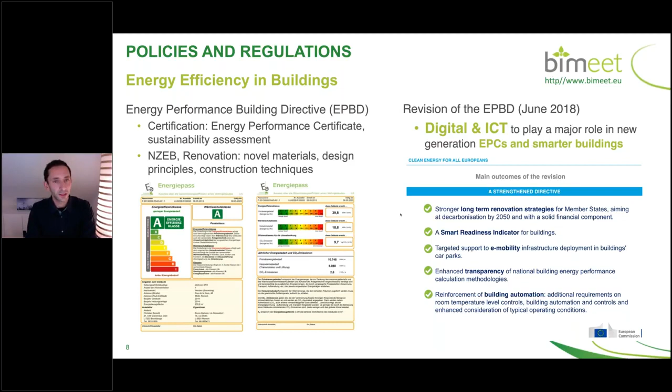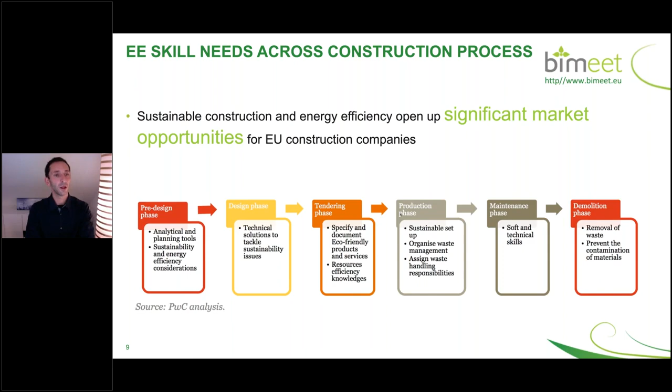In the meantime, we can see that digital technologies, ICT, play a major role now, even with the smart readiness indicator that's focused on the equipment and smartness of buildings. We manipulate more and more digital information, and that's this specific bridge that we wanted to address within BIMEET. Skills are also evolving very rapidly at the moment, and this is related to all the phases of a building life cycle, from pre-design, design phase, to the maintenance and technician roles involved in maintenance and demolition. So we have to look at this global value chain.

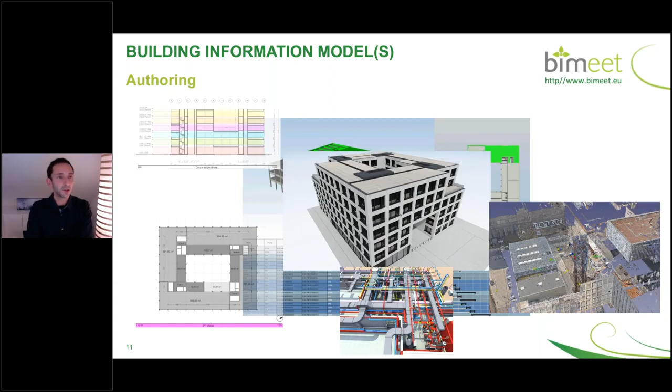In the meantime, BIM has been spreading in the construction sector. We know that there are a lot of skills required for the authoring, the modeling of construction projects, the construction activities, as well as the BIM models used for the maintenance and management of buildings. Together with these models comes building information modeling, all the processes associated with the coordination of the production of the models, such as lean management applied to design and construction. There is a need to coordinate all these models from the various disciplines.

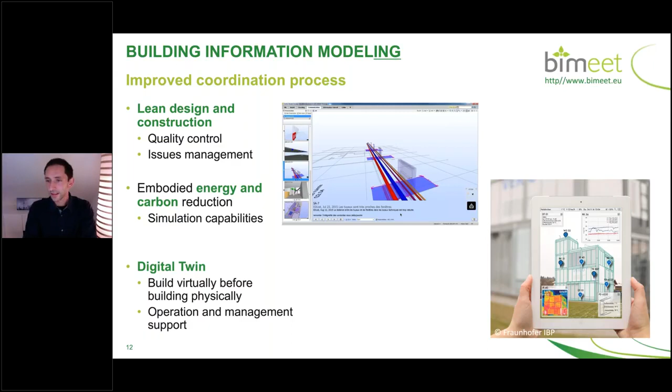There are also opportunities to extract information from these BIM models to simulate, for instance, the energy behavior of a building during its design, or to enrich the model with information gathered during maintenance or the operation phase. And we are going more and more towards this digital twin concept that is increasingly seen and useful. These processes definitely require new skills and competencies from professionals in order to manage this information flow and address the challenges linked to more integration in the value chain.

This is something that has to be tackled by white-collar professionals, of course, the ones that produce the models, but it also deals with the competencies associated with blue-collar workers, the technicians that have to collect and extract information, which is more and more presented in the form of building information mock-up models.

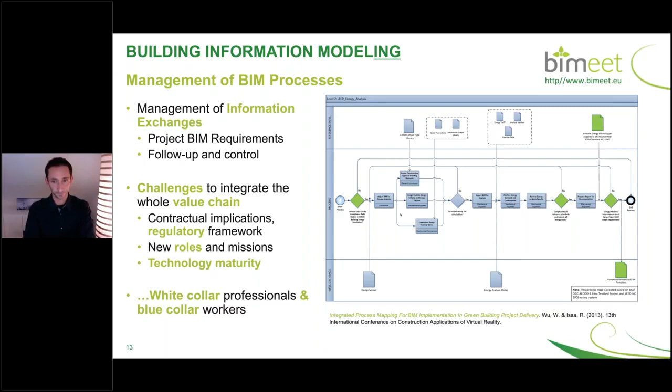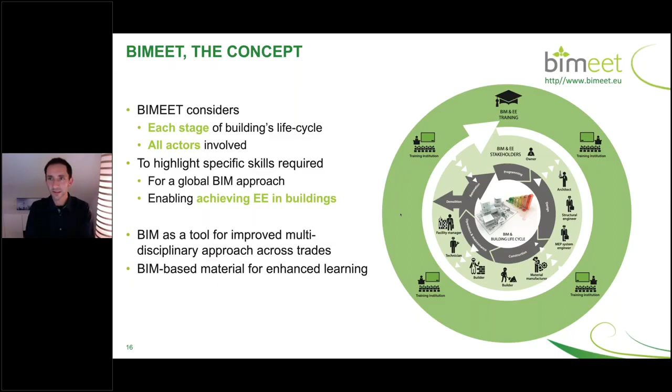From this very generic project, we then addressed the question of BIM and energy efficiency competencies. To summarize, BIMEET dealt with all the stages of a building life cycle and tried to incorporate almost all the actors, a very large value chain of stakeholders involved in the various activities associated with building energy efficiency.

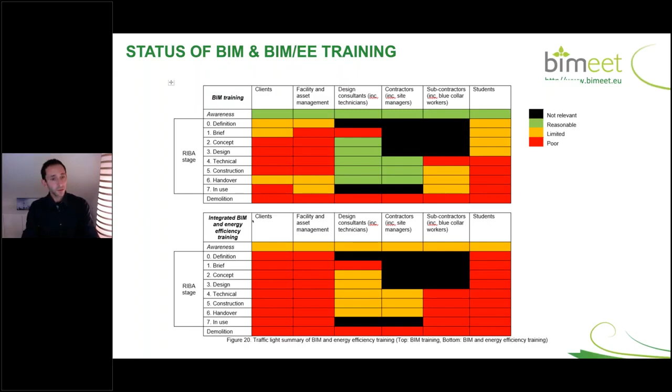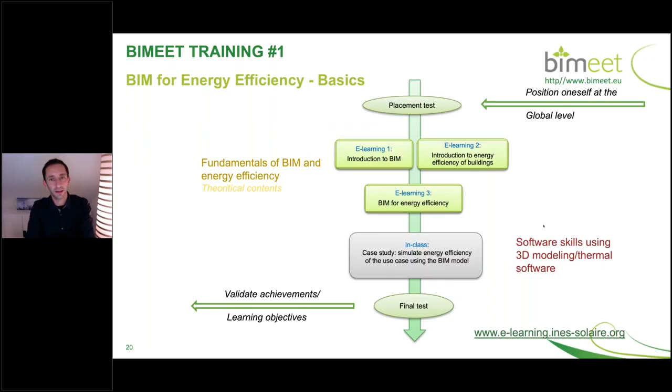For each of the main groups, we have developed learning outcomes based on the review of BIM guidelines, energy efficiency regulations, and so on. So we have a comprehensive list of learning outcomes that we've turned into especially 2 e-learning trainings. The first one addresses BIM for energy efficiency basics, bridging the gap between BIM and energy efficiency trainings. The second one is more focused on the use of BIM for the calculation of energy performance certificates.

Obviously, in this specific e-learning training, we had a general overview and quite general conclusions on future developments, but we also have some country-specific calculation guides for the use of BIM for producing the energy performance certificates.

And as I said, supporting these activities, we have been using and deploying the energybim.com platform, where you can find information on use cases associating BIM and energy efficiency, as well as the list of trainings we have surveyed. Another tool deals with the recommendation of learning outcomes.

So Maury, if you can launch the video, you will see how we use it to create new training modules. Yes, sure, Sylvain. Thank you.

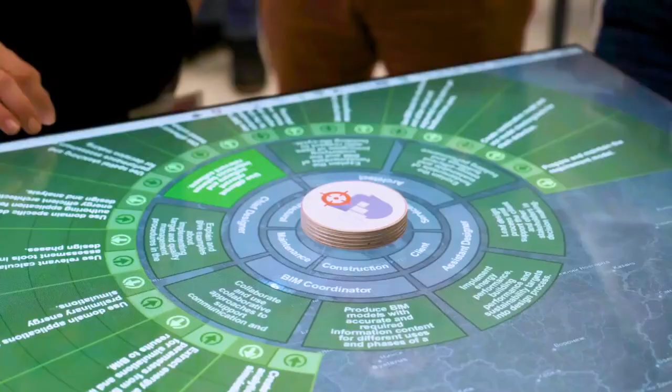On the other hand, they're interested in knowing which trainings are already available, which profiles are covered, which stages of the construction phase are covered by the different trainings, and last but not least, which competences are delivered and at which level to the audience.

Okay, show my screen. So here we are back.

So you've seen my colleague Nico presenting the latest development of this tool. Next steps are for us to push it forward, especially within this Instruct project that comes now, in which we plan to continue developing these trainings and this qualification framework as well.

So this is it for BIMEET. Thank you for your attention.

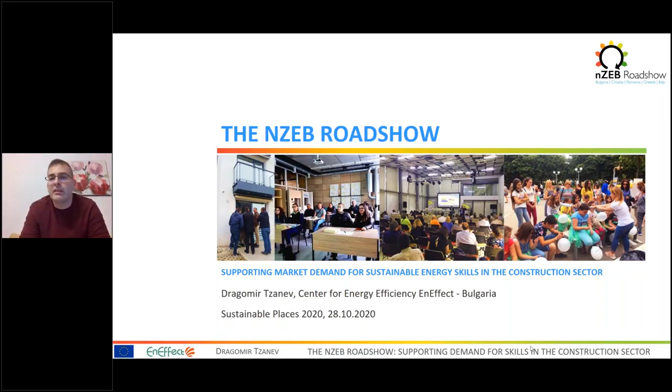So the NZEB roadshow, well, what do we put under that? There's just one simple statement that we want to send to everybody, and this is that there will be no demand for sustainable energy skills if there is no demand for sustainable buildings. So we would like to influence, to have an impact on the market demand for sustainable buildings, and relate that to the importance of the skills for reaching the targets that we set for ourselves.

What would come from this presentation, what to expect? I will share just a few words about the legacy that we have, and it's really important to remind ourselves that we are not starting from the beginning.

Some words about the goals and objectives, what we do in more specific terms, and of course a hint into communication and dissemination, because we really have to update ourselves regularly about what is going on.

We've been extremely lucky to be involved in the Build Up Skills initiative since 2011. The talk started with the EPBD in 2010. We were really quick to understand that the requirements for nearly zero energy buildings require a tight change of skills and knowledge regarding construction in general.

In Pillar 1 and Pillar 2, we focused on improving the state educational standards and training a lot of trainers, developing new programs in Bulgaria and in the region of Central and Eastern Europe, where we were quite active. Then we moved to developing new training facilities.

We were very happy that under Train to NZEB, we actually executed hundreds of trainings. We reached more than 4,000 people, and we established a very good network with producers and distributors of NZEB suitable products, materials, and technologies, which we were able to use further in developing our activities in the area.

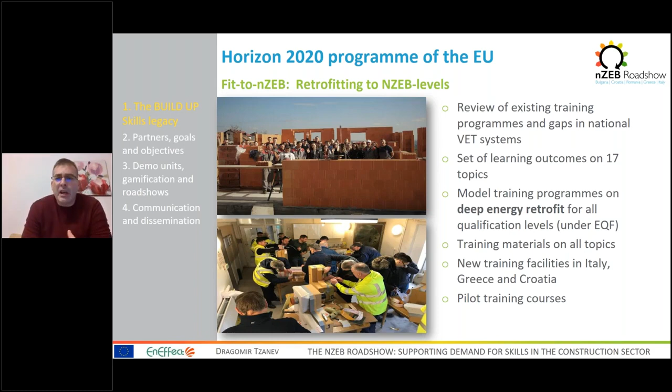Then we moved to the retrofitting of the building stock. That's obviously the issue we're facing all around Europe, and we were very happy to implement specialized training content throughout the educational system in the involved countries, and add new countries to our already good network in Central and Eastern Europe, going a little south and west, involving Italy, Greece, and Croatia.

And then we're coming to the NZEB approach. After these 10 years, we have a really solid base that we can use in order to stimulate a mass training wave regarding sustainability in the construction sector.

But it's not actually happening, because our markets are still driven by the lowest price. We still don't have end user requests for quality, sustainable, efficient buildings. This is what we want to change in the NZEB approach, and we want to go places.

We want to go local, to talk to people, to convince them, to give them what they need in terms of information, in terms of emotions, if you wish, in order to make quality buildings part of their personal values and lifestyles. This is where we want to move.

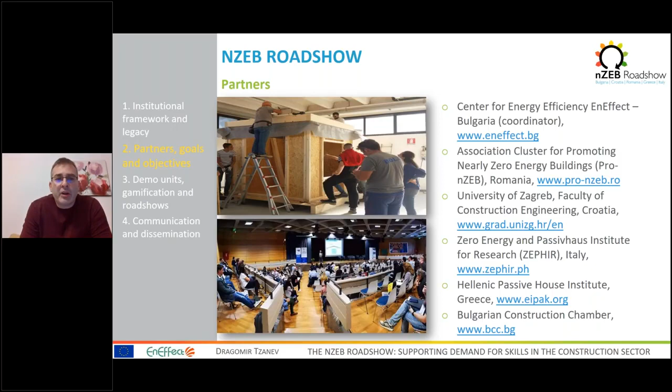Who are we actually? We're working in Bulgaria together with the Bulgarian Construction Chamber, and we have great partners from Romania, which is the NZEB cluster, Pro NZEB. We also have the University of Zagreb, ZEPHIR from Italy, and the Hellenic Passive House Institute. All of these are partners with proven capacity and experience, and I hope it will show from the beginning.

What we have set as objectives: yes, we want to improve the supply of trainings, and we want to approach a certain number of construction specialists. But one thing we really want to do is improve the reputation of the construction sector and the construction profession among young people.

But what is most important, as I already mentioned several times, is to raise interest in new quality buildings. And in order to do that, we plan lots of interactive activities that can make a difference for very different stakeholder groups.

The first activity, which has already been completed - it's not just an expected result, it's a result that's already there - is a very detailed stakeholder mapping, where we want to identify the most valid arguments and the best communication channels for each target group, and develop a market strategy and action plans for each involved country. Despite the COVID situation, we're still managing to go through this.

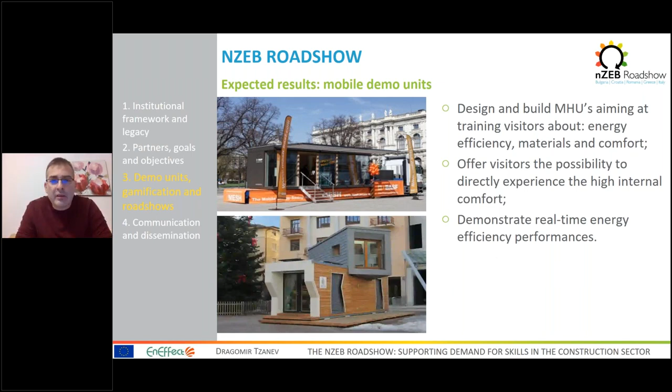Then we want to do mobile demo units. They will be the center of the NZEB days that we plan to conduct around the countries, and we already have a lot of experience in that, coming through ZEPHIR, who developed an excellent project called Biosphere, and already have prototypes for that kind of experience.

And we want to simplify the idea of NZEB, to streamline it for both young and elderly people via games, via really engaging interaction, demonstrated both through the events we are organizing and through the communication channels we will be conducting.

So at the end of the day, we want to conduct NZEB days, at least 3 per country, but the fact is that we are already planning for between 7 and 10 NZEB weeks or NZEB days in each of the involved countries. So we are going large scale, really.

Then what is important and what are the conclusions of that? Our whole experience brings us to the idea that it's not going to happen without personal engagement. So we really engage lots of experts from our teams, but lots of external experts to participate as speakers, as lecturers, as every kind of role within our projects. And we have already started with engaging the different providers of know-how and technologies in the area, and I really trust that this would be a success.

We have already started with development of our communication channel, so here it is where you can follow us and learn about our new products, and also about the schedule of the NZEB days that we are starting from next year, hopefully from April and May. Greece would be the first country that would set the pace, and expect great things there as well because of the new policy programs that are running.

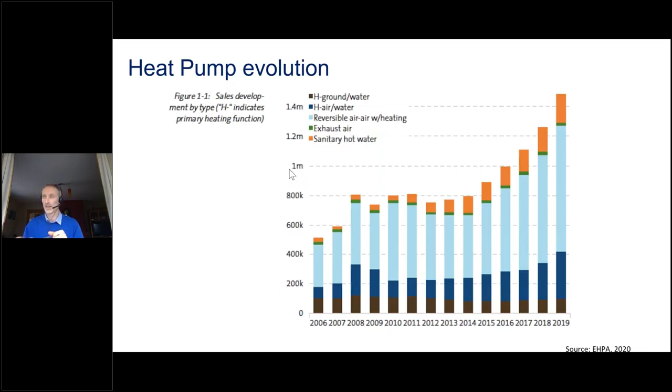So achieving that, we have set a number of key objectives. So the first is similar to many of the broad objectives of previous presentations, where it's looking at a skills and competency framework, but we are focused particularly on the heat pump value chain. So looking at people who are involved in design of systems, in new build or retrofit, all the way right through to craftspeople and construction workers who are in the installation of systems.

We particularly want to then dedicate resources to increasing the skills of construction workers, and we'll do that through a number of pilot initiatives in the partner countries, which I'll explain in a moment. We also want to focus on the pull from the market, so engaging with end users, building owners and clients to ensure that they are able to demand high quality solutions and push the demand for skilled workers. And then obviously to replicate what we learn in our project across Europe, within our national countries, our partner countries, and then across Europe.

Critically, we aim to achieve significant improvement in the energy performance of heat pumps, building on experience we've had in Ireland, where we've looked at optimization of heat pumps and improved their performance by approximately 10%. This was simply done by improving and recommissioning systems—not highly sophisticated technological solutions, but improvements in sizing and installation. We're confident we can replicate that type of improvement across Europe, which will drive additional renewable energy improvements and significant CO2 savings.

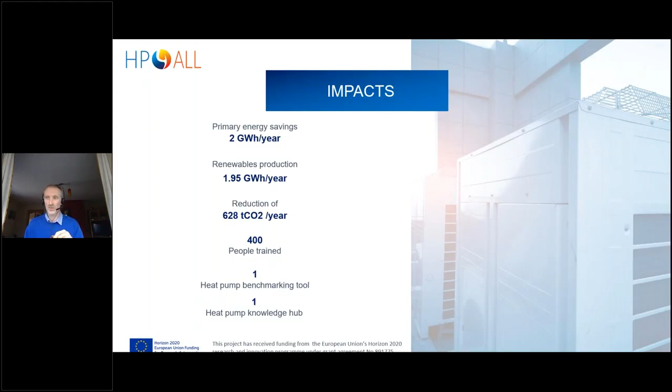Structured around a number of core work packages, Work Packages 2, 3, 4 and 5 are the core activities of our project, and work on Work Package 2 and 4 has commenced in earnest since September. In Work Package 2, we're focusing on learning from best practice in the market, particularly in the renewable heating market—what has happened already, what resources and initiatives are out there to stimulate sustainable energy skills in the heat pump supply chain—and then identifying gaps which we need to address through the HP4ALL project.

Within Work Package 3, we will focus particularly on the trainers, working with industry to develop our competency framework, which will be tested in Work Package 5 in our pilot regions. We've already started to engage with and identify potential end users that will inform us on what knowledge gaps they have regarding heat pumps and their potential application in their building types and typologies. This will involve surveys and engagement, and we will develop both the benchmarking tool and our knowledge hub within that work package, supporting our move towards replication.

Within Work Package 5, we will pilot a range of actions in three countries: Ireland, Austria, and Spain. The ambition there is to provide direct training and capacity building, but also test the knowledge hub, the benchmarking tool, and a range of other initiatives bespoke to each country, looking at residential, non-residential, private and public buildings, both for new build and retrofit. Critically, we're also looking to the future at new innovative technologies and systems, including hybrid heat pump solutions, new refrigerants for heat pumps with low global warming potential, and integration with smart technology and smart grid.